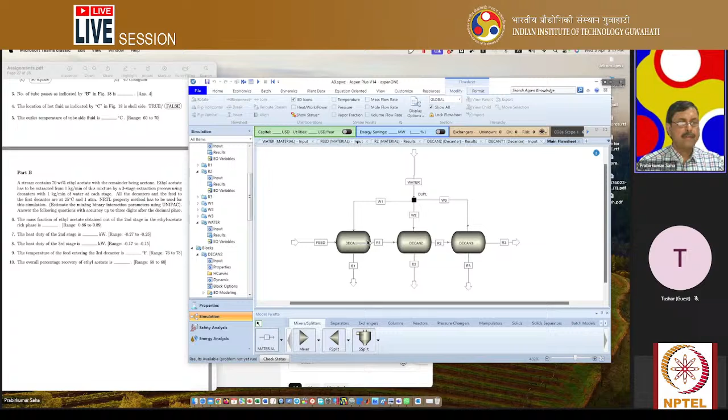So this water is extracting ethyl acetate. This is the extractant and this is the raffinate. The raffinate contains acetone and ethyl acetate. So whichever ethyl acetate has been diluted or mixed with water, that will come here, and the rest is going through this raffinate.

Again this raffinate is being extracted, meaning ethyl acetate is being extracted from this raffinate using 1 kg per minute of water flow. So this is the second raffinate, and this is also treated the same way with the third stage. This is water, this is the third extraction, and this is the final raffinate. So that's how it is.

You have to use the NRTL property method. So we have used the property method NRTL, and we have to estimate missing binary interaction parameters using UNIFAC. So we have done that, binary interaction parameter using UNIFAC. So this is the NRTL, you have estimated using UNIFAC. So you can do it once again.

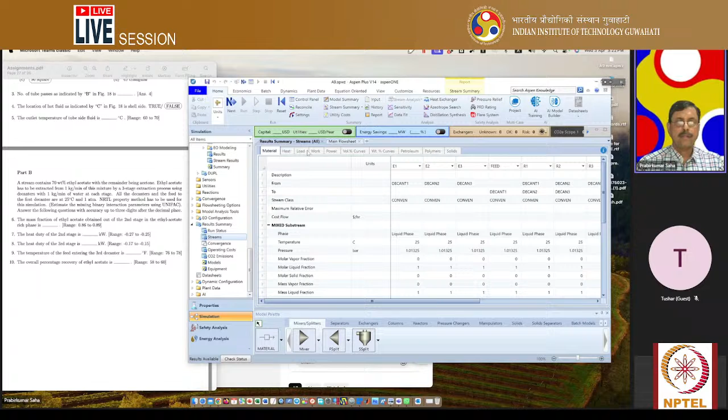For that, you see the stream. Now which are the streams that you have to check? You have to see E1, E2, E3, R1, R2, R3. You can see feed also. So E1, E2, E3, feed, R1, R2, R3 - these are the things that you will see. W1, W2, W3, they are all water.

So they will be 1 kg per minute each. If you see the mass flow rate, water is 1 kg per minute, so it is 60 kg per hour. W1, W2, W3 - these are 60, 60, 60. Or if you want to check it with kg per minute, then it will be 1, 1, 1 for all of them.

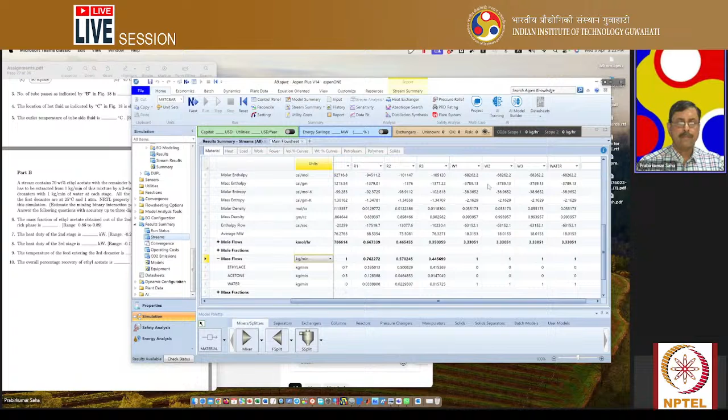Now feed is 1 kg per minute as well, but it has 70% ethyl acetate, 30% acetone. So once you mix this feed with W1, that is water at 1 kg per minute, out of 1 kg per minute we had 0.7 kg per minute of ethyl acetate, and we could extract 0.10, and the rest, 0.6, goes through the raffinate.

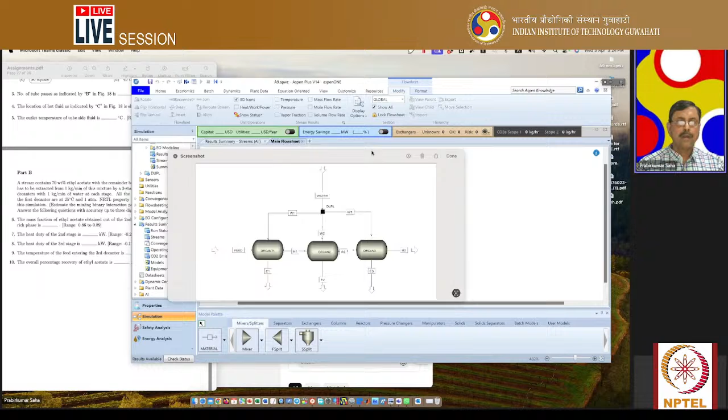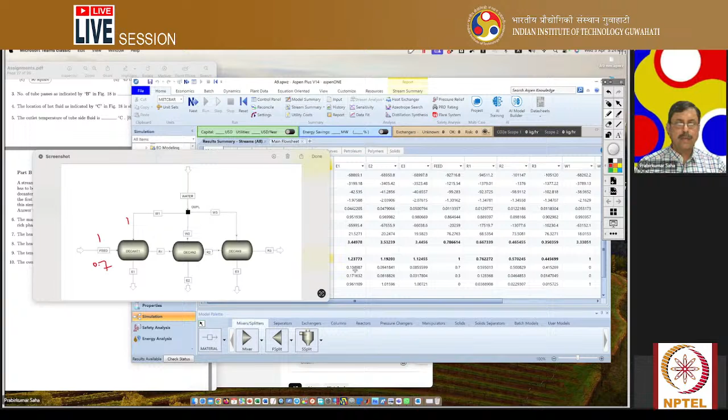So if you compare this with this one - okay, so here you can see the feed is 1 and W is 1, out of which ethyl acetate is 0.7 over here, and E1 is 0.1 say, and raffinate will have 0.6. So through the first decanter, we could extract 0.1 kg out of 0.7.

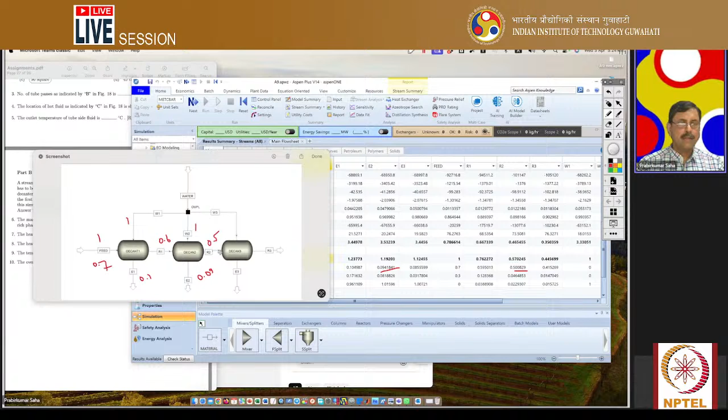So this 0.6 is undergone with the second water stream. And what is the result? E2 and R2. E2 is this much, 0.09. And R2 is having 0.5. Okay, and this 0.5 is again mixed with 1 kg, and E3 is 0.08 or 0.085. And what about R3? It is 0.41.

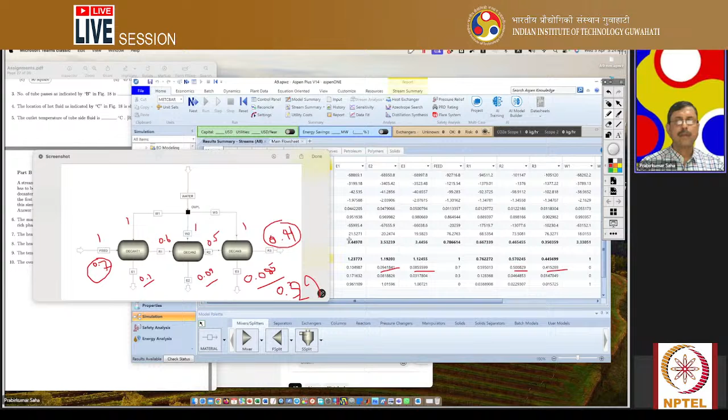Okay, so this is not 0.6, this is 0.41. So we carried 0.7 kg of ethyl acetate. After 3 stages of extraction, we are still having 0.41 kg. So how much we could extract? We could extract 0.1 plus 0.09 plus 0.085, so nearly 0.3 kg. Or 0.7 minus 0.41, around 0.29 kg of ethyl acetate we could extract. Okay, so that's what it is.

That's how you do this calculation. So did you understand, Brito, John Brito?

Okay, Bhaskar is asking how to add nanoparticles in the components and how to mention nano size range by user-defined settings.

For CaO, CuO nanoparticles - Bhaskar, Aspen does not have any specific subroutine for nanoparticles. The only thing is you can use calcium oxide or copper oxide as a solid material, and Aspen can define those as solid.

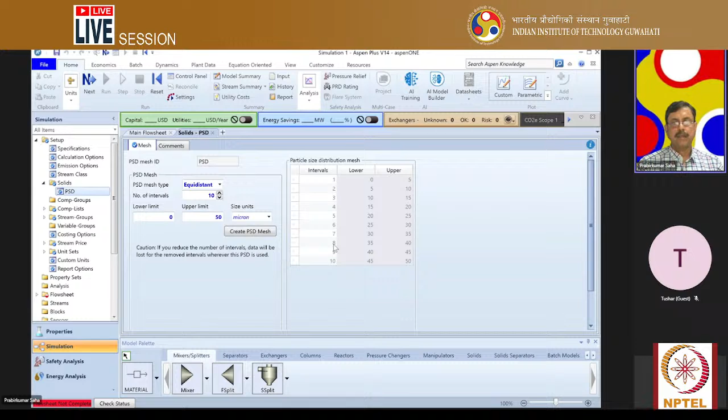So it will be 0 to 5, 5 to 10, 10 to 15, like that. So you create the PSD mesh - the first interval is 0 to 5, second interval is 5 to 10, third interval is 10 to 15, and so on. And when you fix that, if you go to the flow sheet, now these are the solid things like crystallizer, crusher, screen, solid washer.

So in the first course of Aspen Plus, I have covered mixer, splitter, separator, exchanger, column, reactor, pressure changers, and some manipulators. But I have not used this solid separator etc. So in the advanced course, I will use this one.

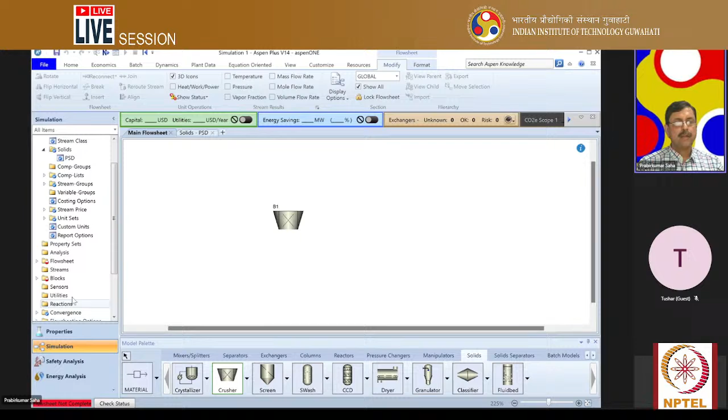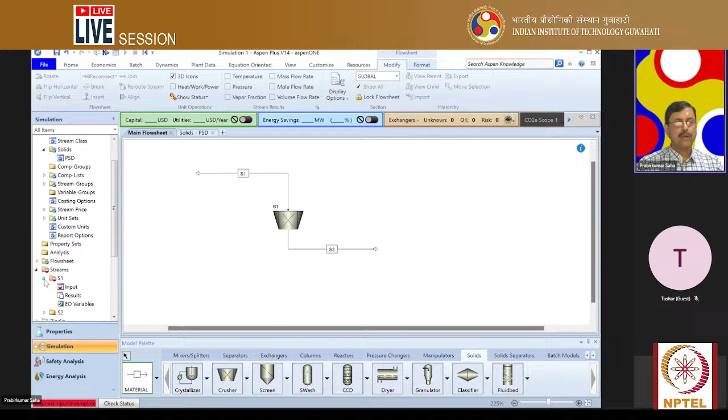Suppose you use crusher, or if you use screen. So if you use crusher, you can enter the feed like that and like that. And just as you do the conventional one, you have to give mixed feed. Now here you do not have any vapor or liquid or anything like that.

Rather, you have solid feed. So the solid feed you can give, say 25 degrees centigrade, 1 bar pressure - so normal temperature and pressure. And mass flow, you can say 10 kg per hour.

Here you have to give the particle size distribution. So the particle size distribution, already you have created 0 to 5, 5 to 10, 10 to 15. Now you have to say weight fraction - what is the weight fraction of the different intervals, in the different intervals of the particles that you are having from 0 to 50.

Now you can do the user specified. So you can say, well, I have 50% particles over there, and then 10% in the range of 5 to 10, then 0 or 2% in the range of 10 to 15. Like that you can give up to 50.

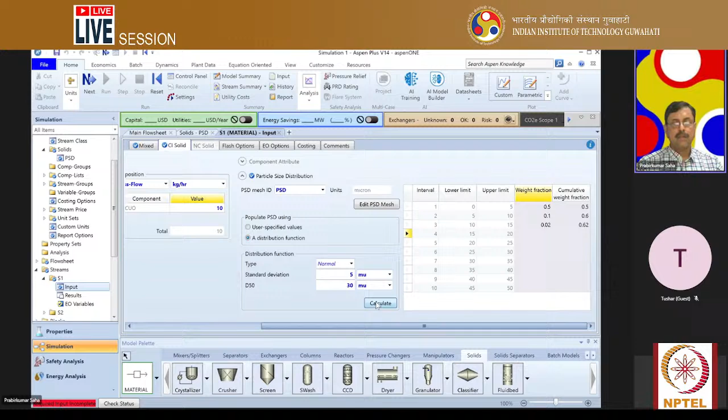Now see, the particle size distribution has been given over here. This is the inlet particle size distribution. So that inlet particle size distribution, here you will have the table. So this is the weight fraction of each and every interval, calculated using the normal distribution. This is absolute weight fraction of particles between individual interval, and this is using cumulative weight fraction.

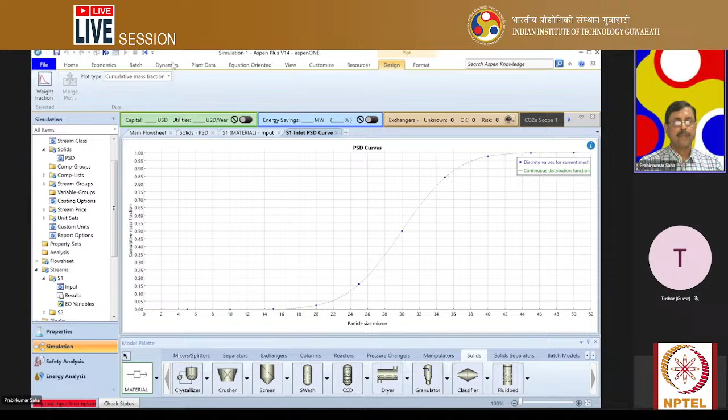And they have D50 of 30 micron and standard deviation of 5 micron. So you can see the 30 micron range, that is the D50, 50%. This is the D50 at 30. So like that you have to fix the particle size distribution.

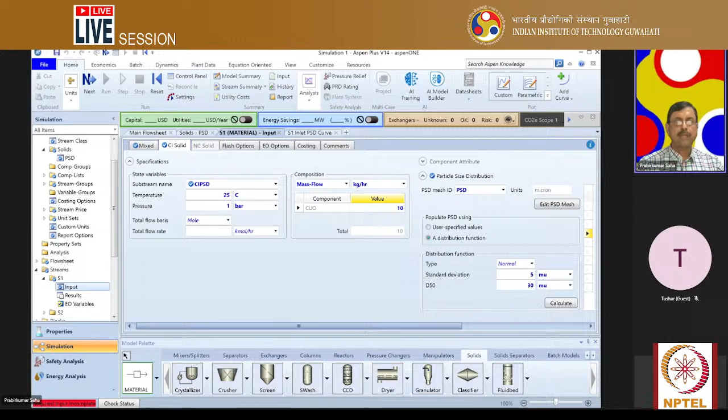Now this way you have to handle the solids, and it has more details into it. So I have not covered them in the first course or basic course of Aspen Plus. This I will cover in the advanced course of Aspen Plus. I believe if you take the advanced course of Aspen Plus later, although I have not floated it yet, but I will do it as soon as I can prepare the video lectures. Then you can learn it better, and I'm sure you will be able to use the kind of nanoparticles that you want.

Till then, you have to wait. Okay, Bhaskar?

Arju is saying you discussed about methanol from syngas. I'm trying ethanol from syngas. I have only the following reactions. In my case, water is also in the reaction. Could you please help me to solve it?

First, I have to try out myself, you know. Without trying out myself, I cannot give you advice. So you can give those reactions to me through email, Arju. My email address, you must be knowing by now - it is p.saha@, sorry it is not Gmail, it is iitg.ac.in. So p.saha@iitg.ac.in. Please write an email through this. You can email your requirement. I can solve the problem myself, and then I can advise you further.

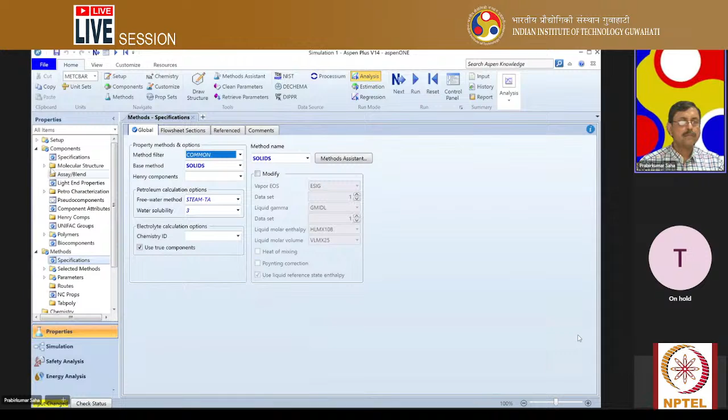I do not know about this particular enzyme called lipase. If lipase is there, let us check whether lipase is there. No, it's not possible, it's not there, Sai Kumar.

Again, Arju is asking which is the best reactor in Aspen Plus to produce syngas from biomass. I don't have any exact data of reaction kinetics.

Okay Arju, Aspen Plus is not an engineer. Aspen Plus is a computer program. You are the engineer, so you have to know all that information. Aspen Plus will not tell you.